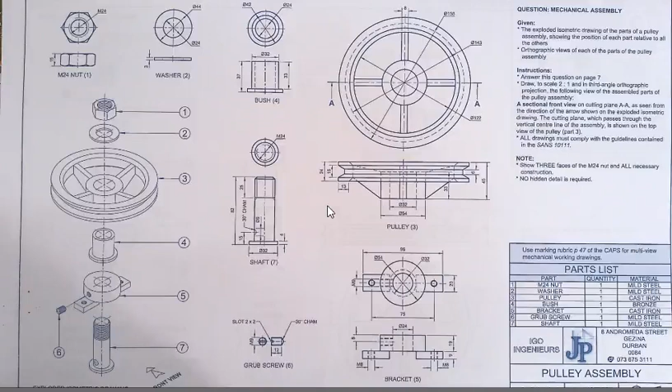Okay, grade 11, so I'm going to show you guys what to do. First things first, we need some steps to answer this thing. We're going to do this over 2 days, and then you should be able to do an assembly drawing.

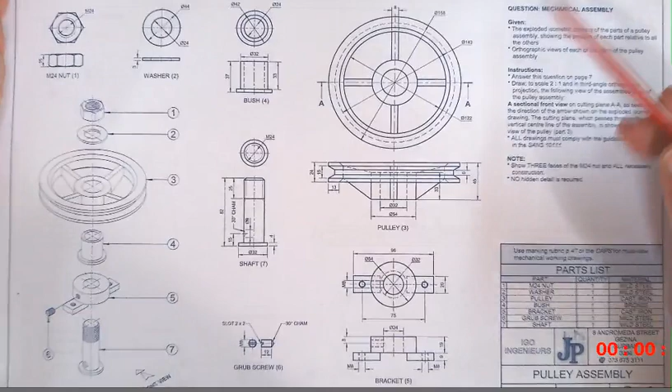First of all, if you get a drawing like this, the first thing you do before anything else is go and have a look at what's down here. This is your first step, step number 1. You have a look at what is provided. Very important, you check what is the front view.

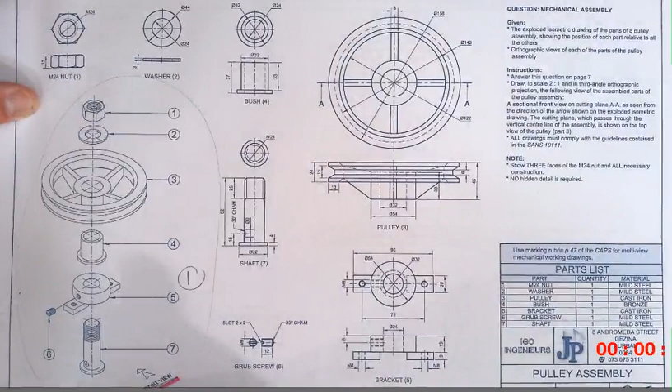And remember, we are working in third angle orthographic projection, which means that our views are going to be like this.

So you're going to write the second. This is going to be front view, top view, right view and left view.

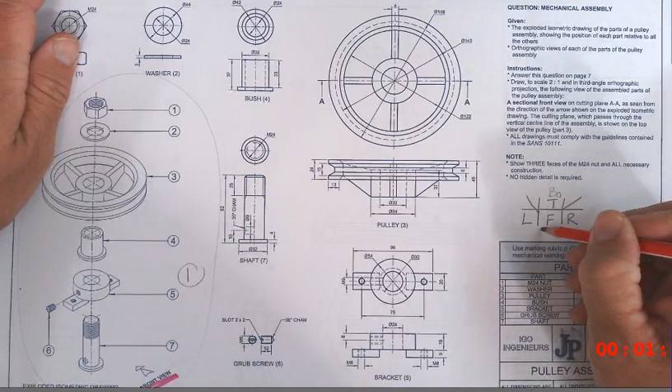They tell us that this part fits through that part. We can see it, you see a little hole there. We analyze this, we see this hole has thread in it, so that can go in there. We see a little hole there at the bottom, which tells me that most probably this screw is going to end up within that thing there.

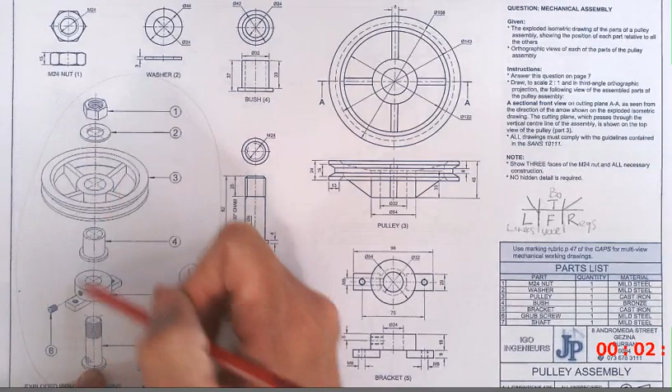Then we have a bush. This part fits into the pulley. We've got a washer on the top. We've got this screw thread protruding through the pulley and through this part at the bottom, through the bush, and the washer is going to be on the top, and the nut is going to turn onto this thing. So this is basically what's going to happen.

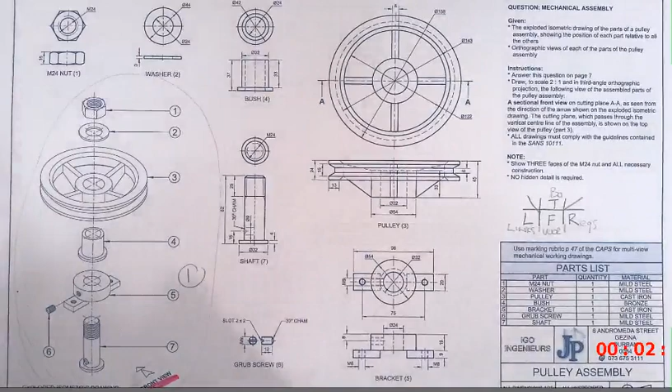All these things are going to be compiled into one object, and then we're going to cut it. So let's quickly read the question. The question says, the exploded isometric view of all the parts, this did. Orthographic views of each of the parts of the pulley assembly.

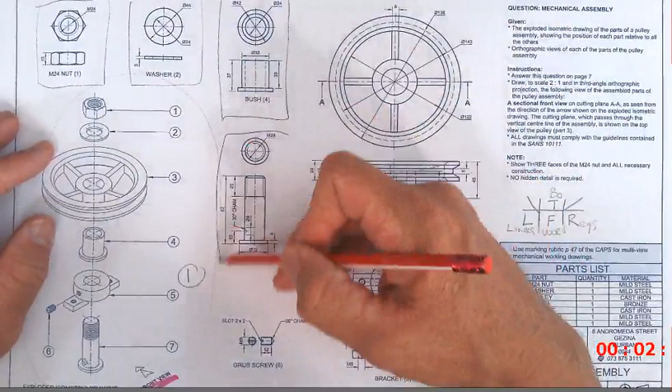So this is, you guys can do this. This one part, that's part number 4. This is part number 7. This is part number 3. This is part number 5. And this is part number 6.

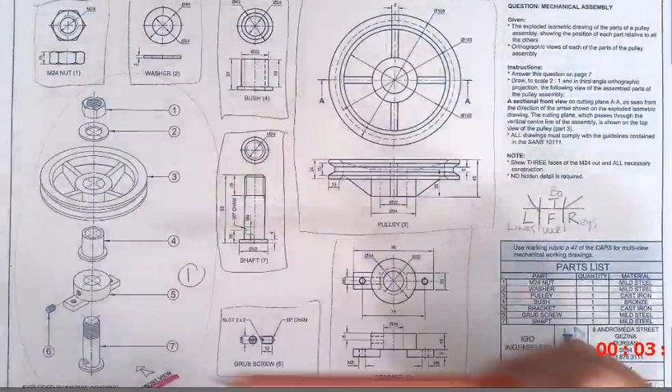Front view and left view. We get the front view and the top view, front view and top view.

Now, here's important. Now they say, answer this question on page 7. Draw to a scale of, this is important. What scale do we need to draw?

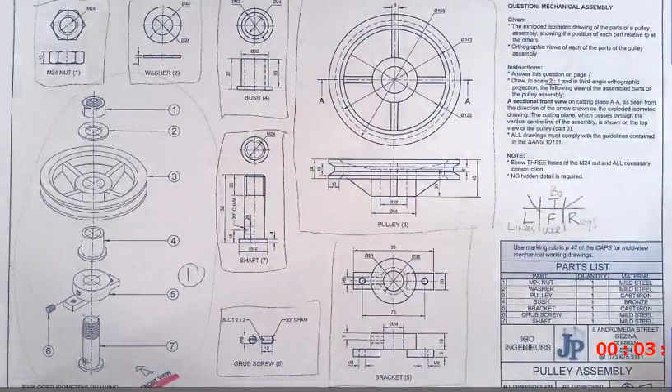2 times bigger than the provided measurement. So write that down for yourself there. Then they tell you, draw a sectional front view on cutting plane AA.

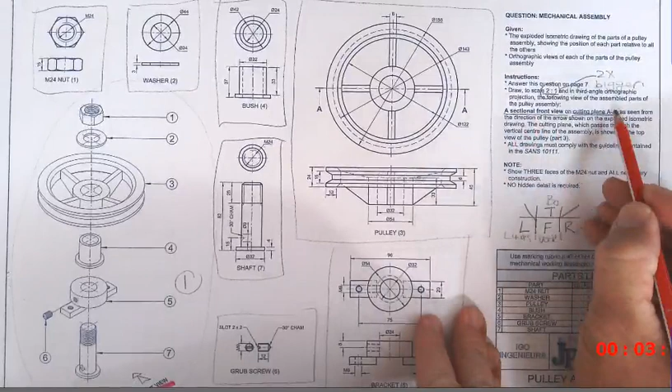What type of section is this, Baraka? This would be a full section.

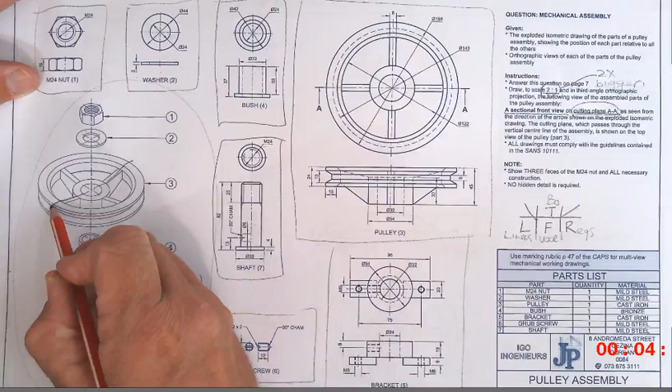Well done. And so my section, if this is the front view, it would mean that my section is going to pass through here. You can mark it in there. Going to pass through this whole thing. It's going to pass through that part there. It's going to cut through everything. It's going to cut through this part.

It's going to cut through the bolt, although we don't cut this. It's going to cut through the washer, although we don't cut it. And it's going to cut through the nut, but we don't cut it. Okay, so let's quickly see. We don't cut the nut. We don't cut the washer. We don't cut the bolt.

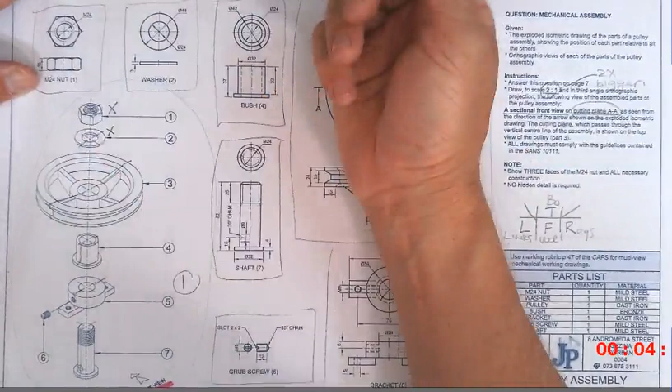What type of section are we going to use around that thing? Wilmien, we said yesterday, what type of hatching is going to be around that hole?

Good. There's going to be a part section.

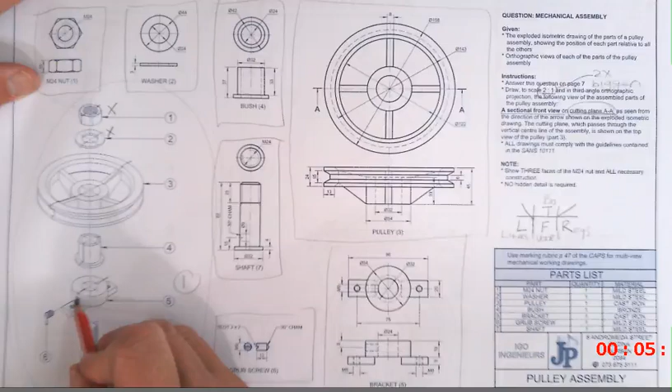Very nice. Okay, so now what we're going to do is cut all the parts. We're going to cut everything and then put it together.

So quickly write down what I tell you: make a cross there, no, we're not going to cut this, encircle that view because this is what you see from the front. If you guys look at this, it's part number 5, we're going to see this view.

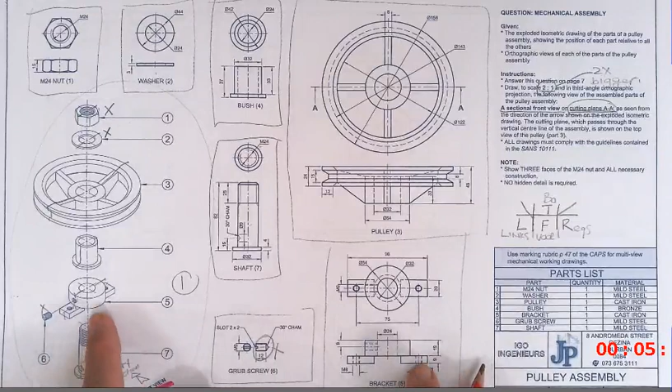Okay, so that one you can circle, it's going to be cut. We're going to cut this thing here, the bush. Okay, we are going to cut through the pulley, which is this one.

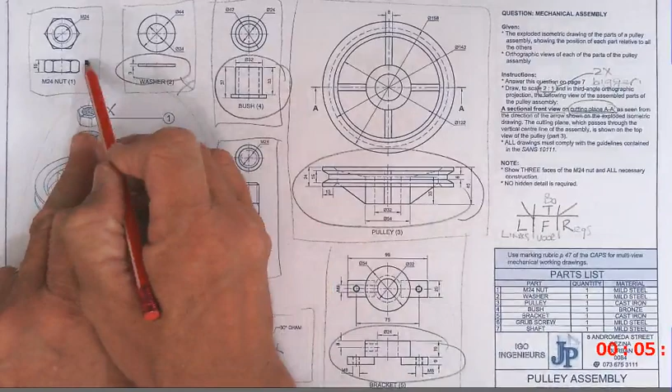So the part section is going to come in here. You guys can quickly note that down. You guys are going to do a part section there, hatching around that little thing there.

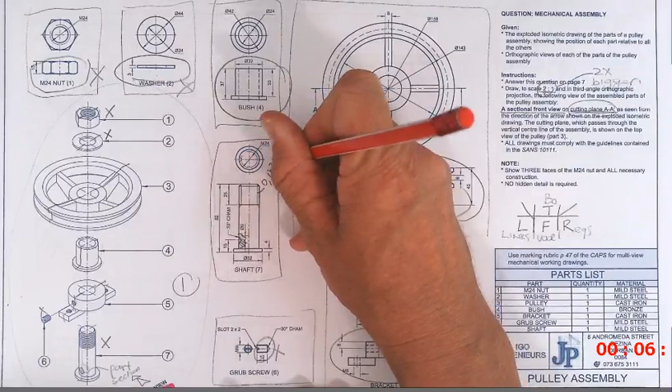The screw thread here is going to be, write this in, 0.1 times 24. Why? Because it's an M24 bolt. What does that mean? M24 means that it's from that line there to this line there, it would be 24.

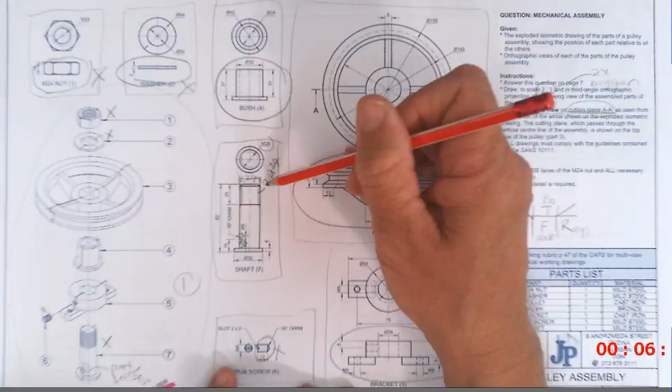Do you have that? So the screw thread there is going to be 0.1. What is 0.1 times 24? Equals 2.4. Okay, this is going to be a 60-degree line.

That is going to be a 45-degree line. Okay, now we can begin to draw.

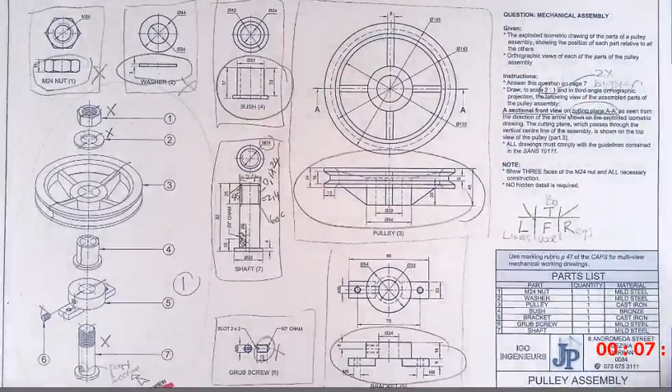So I want to quickly ask you, where do I start now? Where do I start with my drawing? I need to draw the sectional front view.

Okay, what else must I draw? Anything else? No, that's the only thing that you have to draw.

Okay, but what we're going to do is start this drawing off. So the question is, where do we start? You see right through the middle there's a center line.

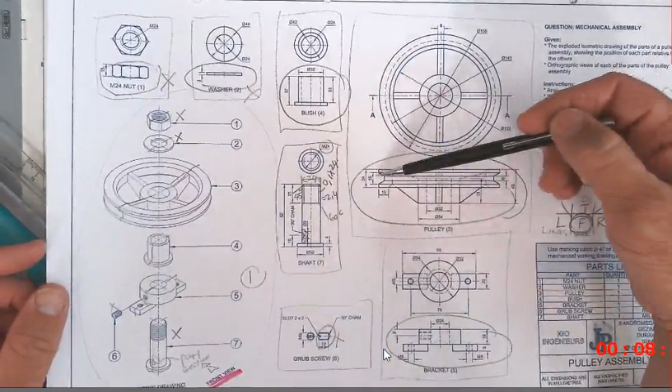Now I would obviously probably start at the top, and I'm going to start with this view here. And if we cut through something, we're going to keep the outline, that's one way of doing it. You can start with the biggest part, or you can start with a shaft.

Okay, that's also a nice place to start. So if we start with a shaft, or with this part here at the bottom, these things will all be assembled. So this is going to go into that part.

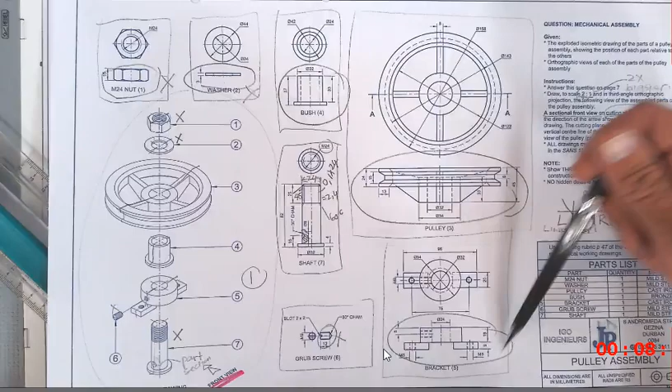So my guess would be, I'm going to start with a bracket this time, this part number 5. You can start in one of many places. I'm going to begin there. Remember, we need to double up everything.

So the 24 becomes 48, etc. M8 becomes M16. So I'm going to start with this part. You guys can do this with me. I'm first going to draw the outline.

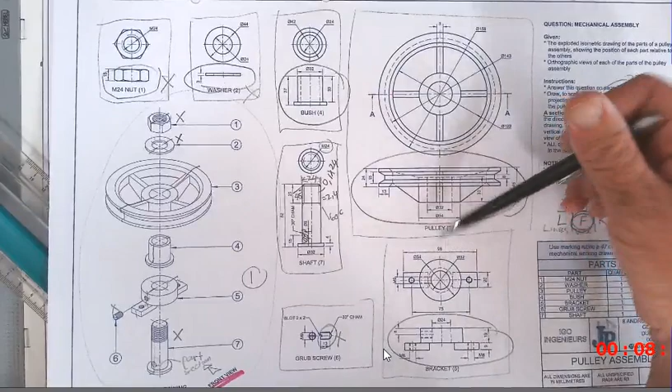And the measurement there is 96 times 2. What is 96 times 2? Minus 8. So 200 minus 8. What is that? 192. Am I right? Let's quickly check.

96 times 2: 6 times 2 is 12, 2 times 9 is 18 plus 1 is 19. So this is going to be 192. You guys can write this in.

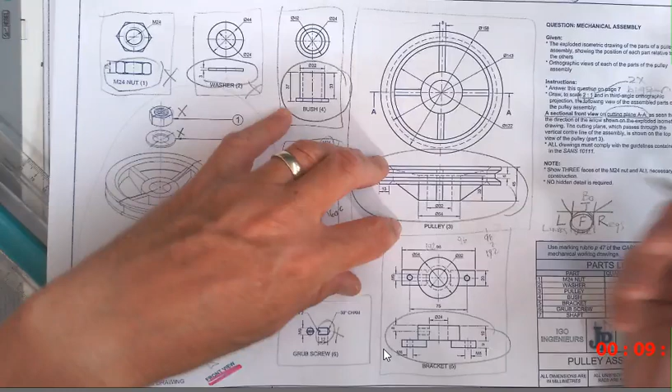This is going to be 54. Double that. What is that going to be? Oh, it's okay. Just write radius 54, which is half of that.

This is going to be radius 32. Why? Because the diameter is the full thing. So the radius is... anyhow, this is going to be 64 diameter, which is radius 32.

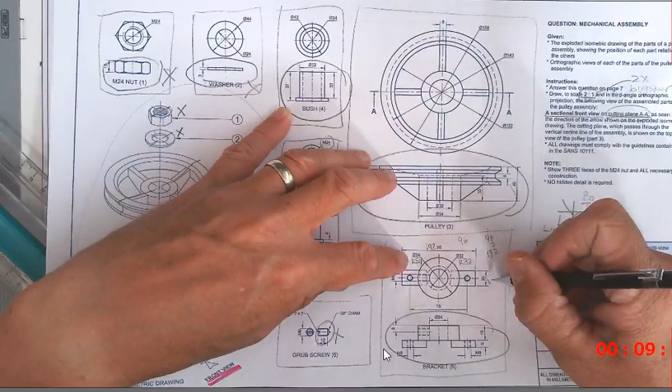Okay, this is going to become 40. This is going to become M18. Okay, the thread, that 75 is going to become 150.

So I'm going to start off with a center line. I'm going to have to draw this view here. It's going to be 192 from one side to the other side. So I'm going to start there - one from the bottom slightly. Well, first let's get the middle of the page.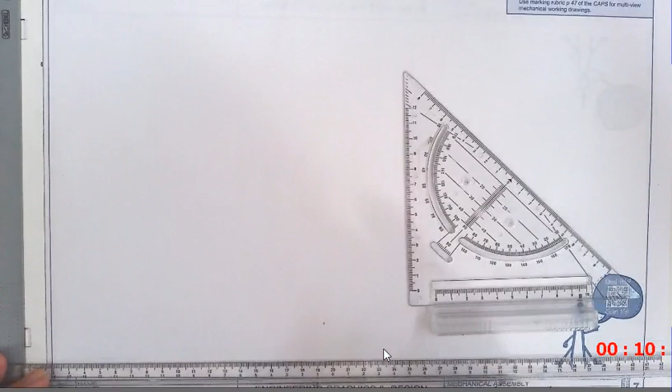Right, so I'm gonna be drawing a line here at the bottom, just because my drawing ruler, this is not the correct ruler for this board. Just gonna draw a line here at the bottom. Now I'm gonna line it up still here on the board. Okay, I'm gonna draw a center line here in the middle.

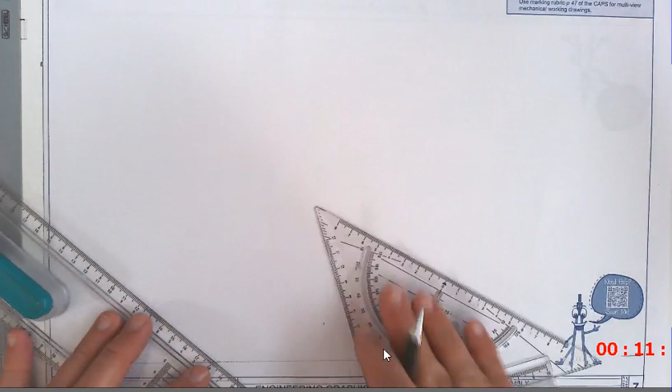Very important. So, center line here in the middle.

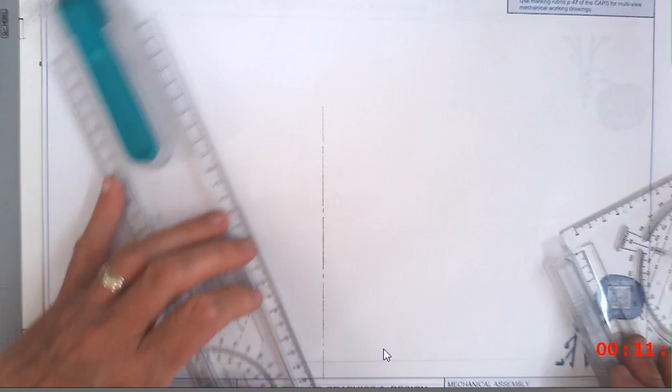Now I'm making a center line. I need to have a center line, because this is my reference from which I am going to work. It's always the best to have a center line when you're starting off.

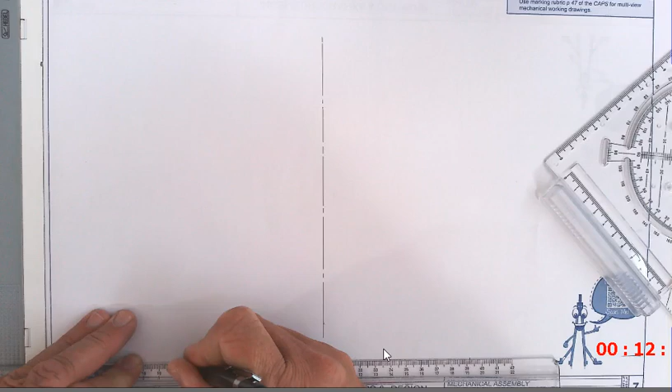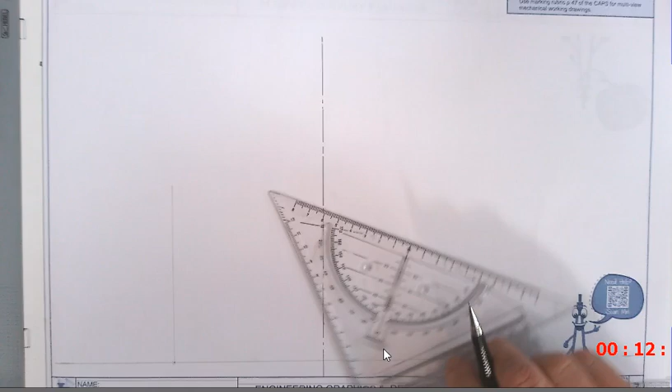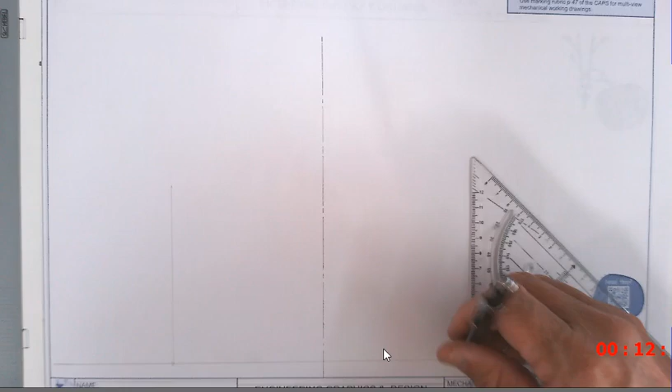So here's my bottom line. 96, I'm just going to make a construction first. I'm going to draw a construction line on this side, and move it up, and draw it on this side.

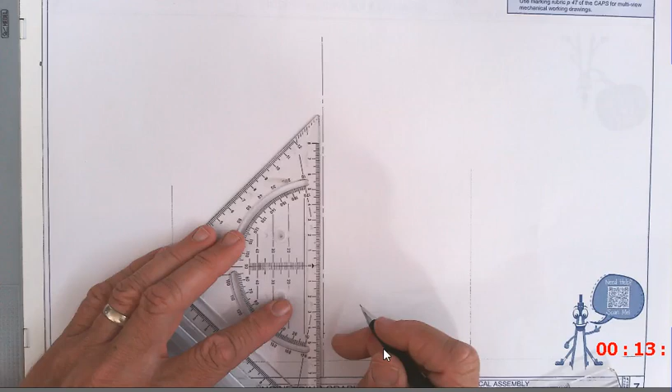18 plus 38, we're going to do this. 10, 15, 16, 17, 18. And then another 38: 10, 20, 30, 35, 36, 37, 38. There it is, 38.

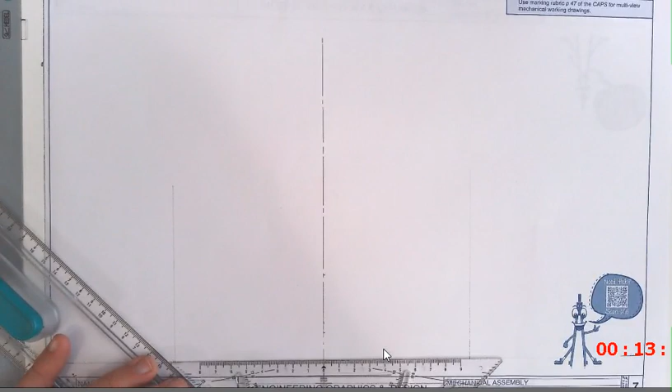Okay, alright, let's start off here. We're gonna draw a construction line here. All light lines first, just construction lines first.

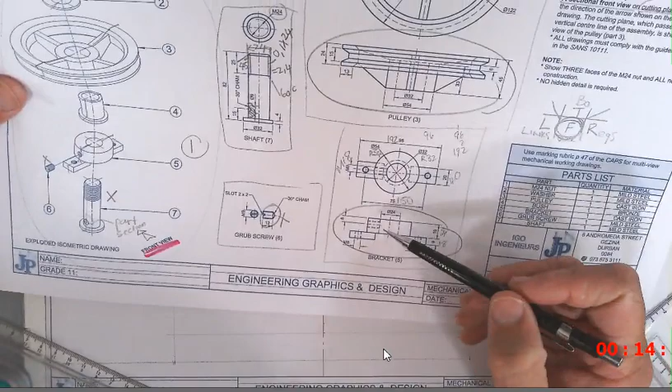Remember, we are drawing against time, so every second counts. Try and keep your drawing time shorter. Okay, we spoke about this.

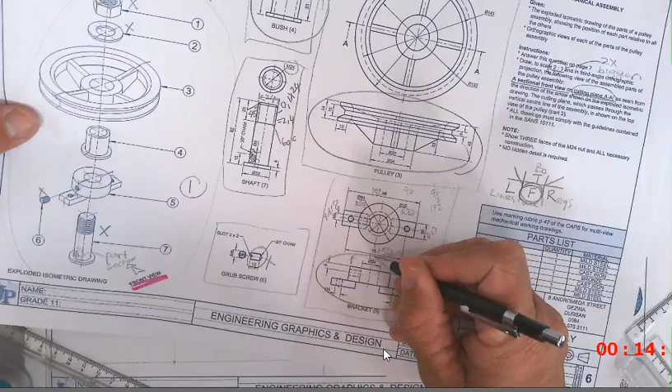This is going to be a radius of 54. But that 54 times 2 gives me what? 108, am I right? So that distance should be 108. 54 times 2, is it right? 108. Let's quickly draw that in.

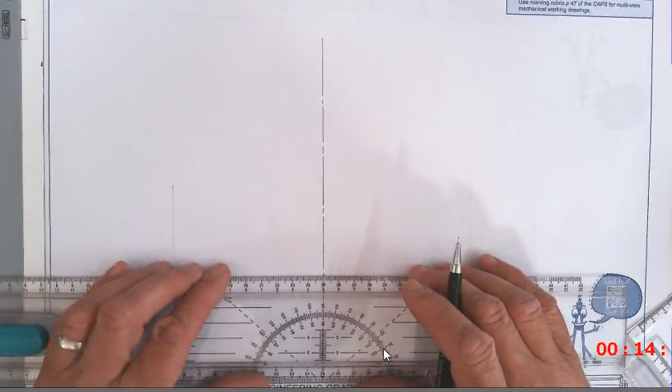So it's 54 in both directions, so we can quickly do that. On this side: 10, 20, 30, 40, 50, 54 on this side.

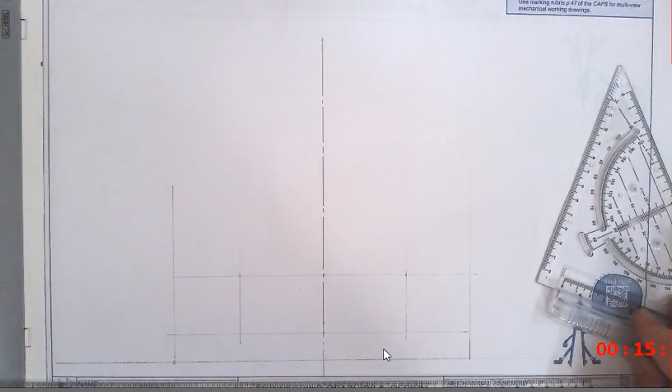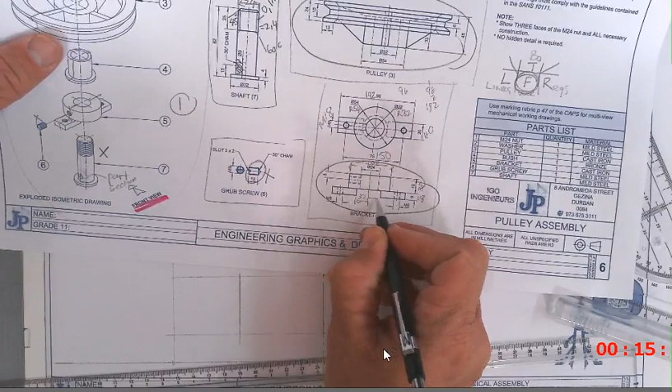That is radius 32, so that's going to be 64, so it's 32 to this side, 32. So this is going to be, from the center, 32 to the left and 32 to the right, and that's going to go in.

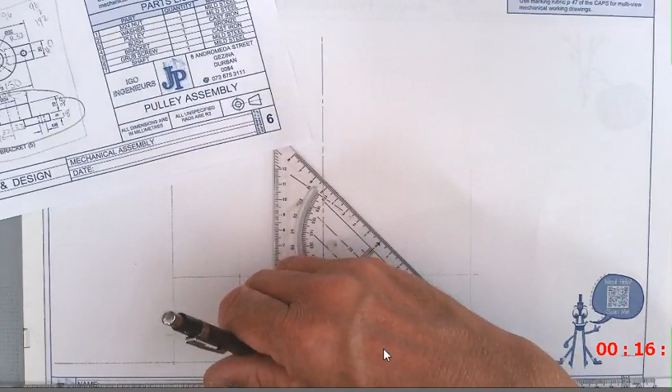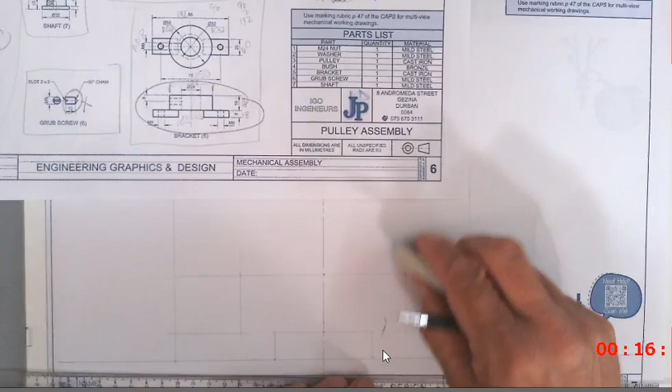Now we're going to quickly cut this thing through. Remember what I told you guys, if we're going to cut this through, we're only going to keep the outline. So I can literally go and remove that line. You don't have to erase the whole thing, you don't have to erase construction lines, but just for clarity.

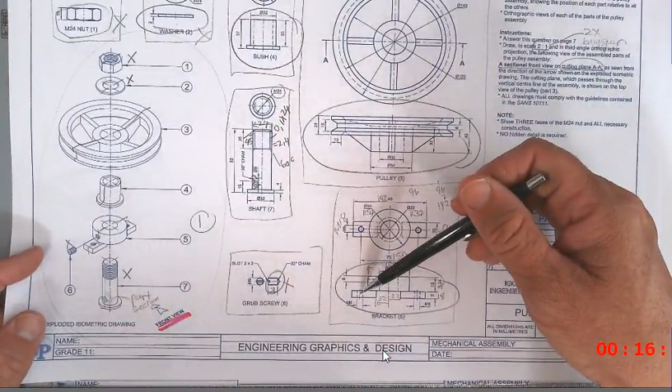Okay, so this is this bottom part. I've cut this thing through in the middle, so I've cut this thing through there. I'm going to cut through the thread there and there, which means that M8 is now M16.

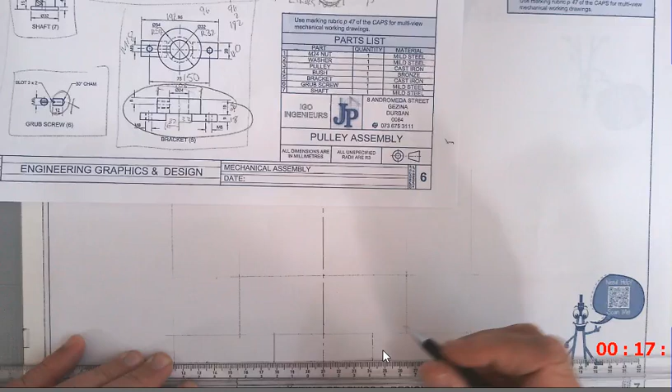So that is from the side. Let's quickly have a look. It's 75 to the one side and 75 to the other side, because it's times 2. Let's quickly measure that off: 75, 10, 20, 30, 40, 50, 60, 70... 75 is here. And then also 10, 20, 30, 40, 50, 60, 70, 75.

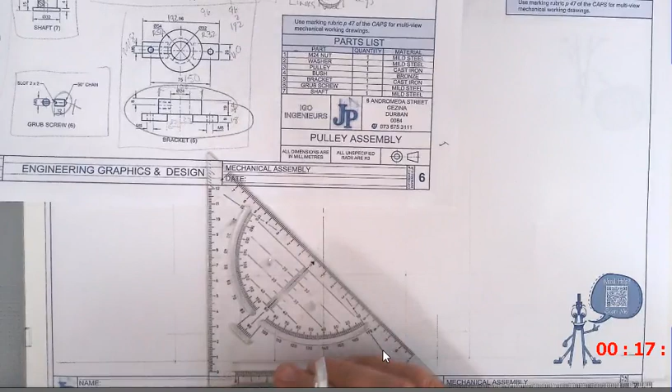Because it's the center of something round, we always put a center line where it's the center of an object, or when there's going to be something round in shape there, like a circle or a hole or something solid.

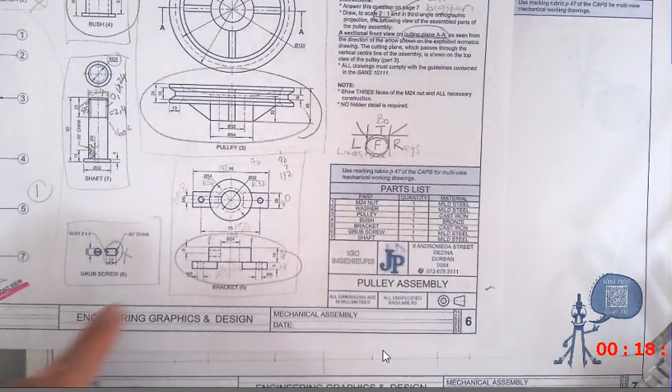Okay, that's going to be M8. So that means M8, a bolt that is double that size will fit in there. Why double? Because it's scale 2 to 1. So that becomes M16. So I'm going to measure 8 towards every side here.

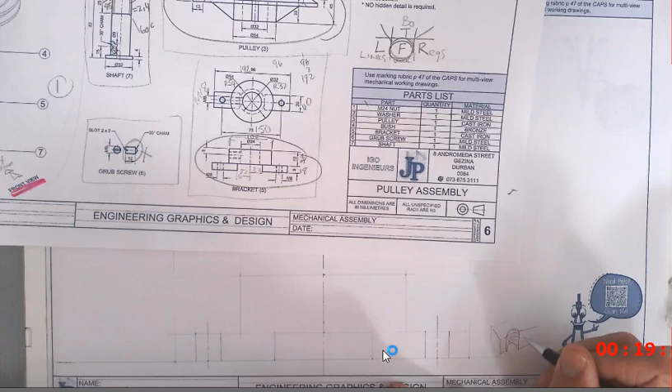And you're going to have a double line here. Why? Because it makes a zigzag pattern there in reality. And that zigzag line is drawn as a double line.

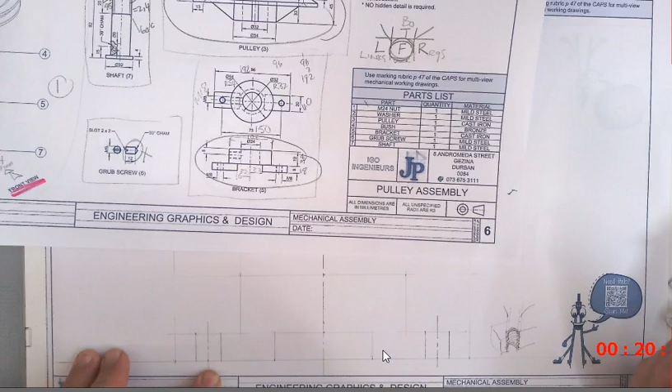But I am still having a circle there at the top and a circle at the bottom. That's the reason why there's going to be a line there. That's that line, this is the bottom line, and the thread will now have a size, because it's M8 is going to become M16.

So this hole is 16 from the one side to the other side. The thread here will be that size divided by 10. In other words, 16 divided by 10 is 1,

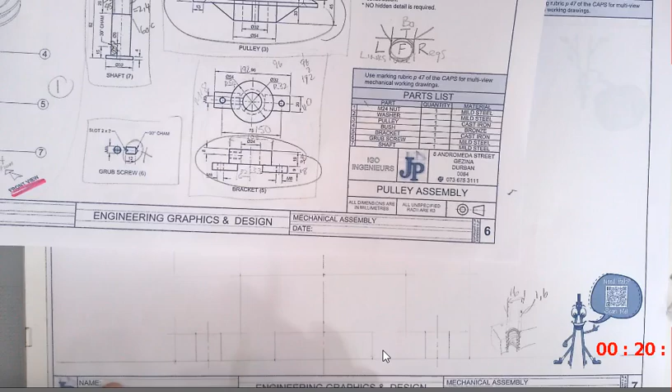Okay, so ek gaan dit gou hierso ook gou vir jou doen. So 1,6 on the one side. Inward, it's basically 1.6 millimeters.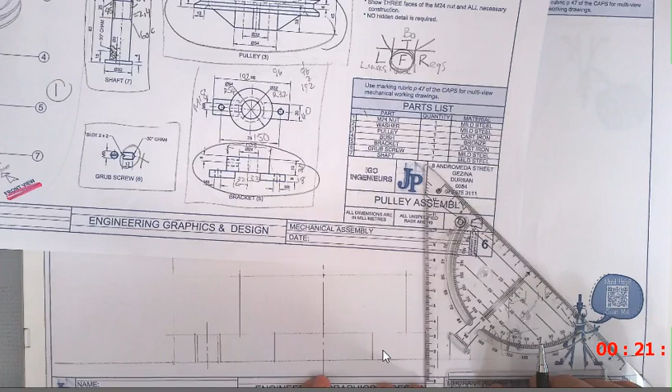Okay, so daar's die skroefdraad, there's the screw thread.

Okay, so I'm going to measure off. This measurement is 8 times 2, which is 16.

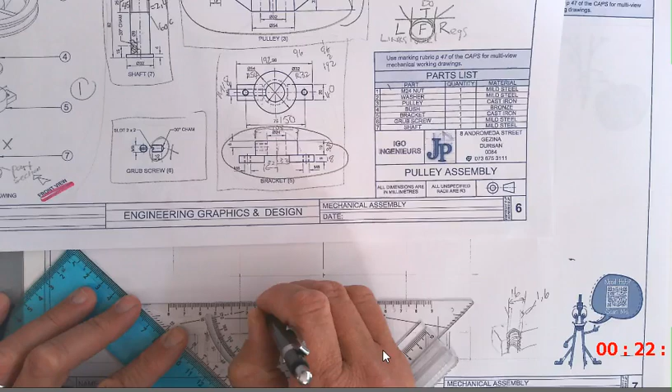And I put a center line in here. And here's a binnekant, there's an inside here. It's going to be diameter 24, so I'm going to measure 24 in both directions. 24 this side, 10, 20, 24 that side.